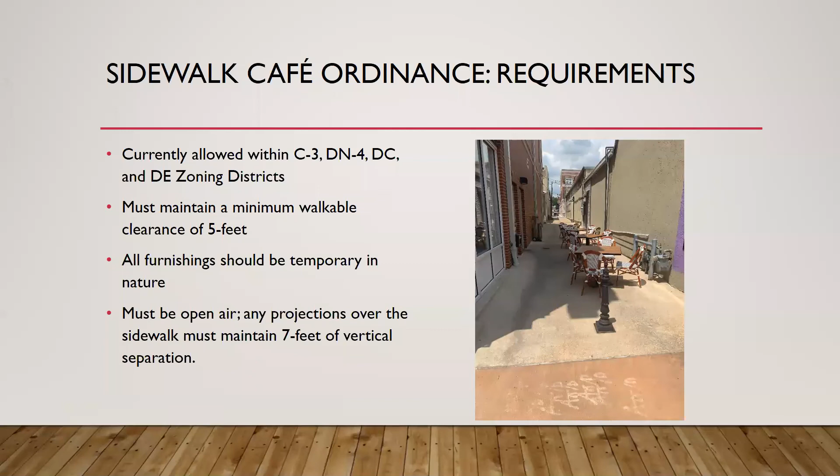The requirements for sidewalk cafes are very general. You just have to allow a minimum walkable clearance space of 5 feet between your outdoor furniture and the building, or the outdoor furniture and street trees. As long as there's 5 feet of walkable space, you're good. All furnishings must be temporary in nature, so they need to be such that you can take them out and put them away after close of business. Sidewalk cafes need to be open air, and any projections over the sidewalk must maintain 7 feet of vertical separation. So let's say you have an umbrella on the table for your sidewalk cafe — there has to be 7 feet from the bottom of the umbrella to the sidewalk itself.

The application process right now for sidewalk cafes is very simple. We just ask that you submit a written request to the planning department at planning@bentonvillear.com and include a diagram showing the location of the sidewalk cafe in relation to the building, sidewalk, and street. The one on the right-hand side of the screen is an application we received where they gave us an actual architectural site plan. You don't necessarily have to go to that level of detail, but we need to understand generally where it's going to be located, where the furniture is going to be, and how it sits in relation to the street and sidewalk. A letter of approval will be issued to the applicant from Ellen, our director. We can also help provide maps if you need assistance with our GIS site — we can provide an aerial photograph of your site, and you can lay it out or draw it from there.

With that being said, that's what we currently do in regard to outdoor dining downtown. So we'll transition now into a discussion about the ordinance that's going next Tuesday.

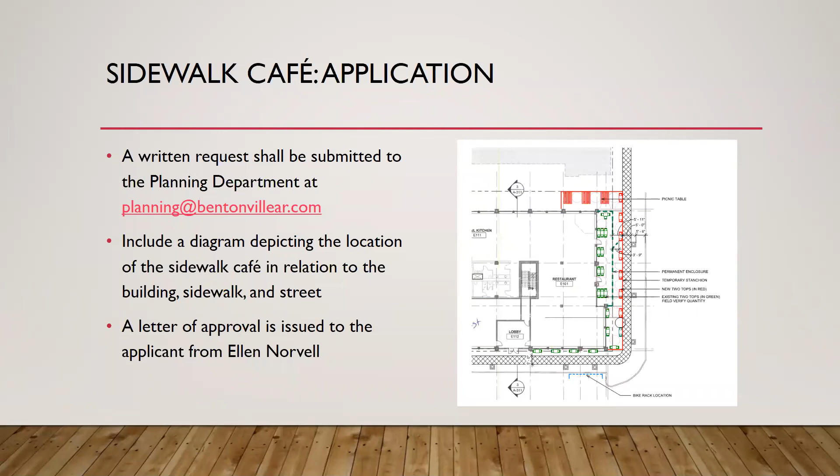We received a lot of questions and discussions. People understood, yes, I know I can do things out in front of my building and the sidewalk, but what about these public parking spaces a little bit closer to the street? Well, we've come up with a solution in the idea of parklets.

Parklets are defined by NACTO as public seating platforms that convert curbside parking spaces into vibrant community spaces. The idea behind a parklet is that it allows you to convert that public parking space into outdoor dining and seating space. It allows you to utilize public space for private uses, and it allows downtown business owners to utilize that critical space adjacent to their property.

Let's explain what NACTO is for people who may be on the line that don't understand what that is. NACTO is the National Association of City Transportation Officials. It's essentially a professional organization that has their Urban Street Design Guide. They have an Urban Parking Design Guideline. They provide these guidelines to city, state, and federal officials so that they can better design the urban form around some nationally accepted standards, for functionality and safety.

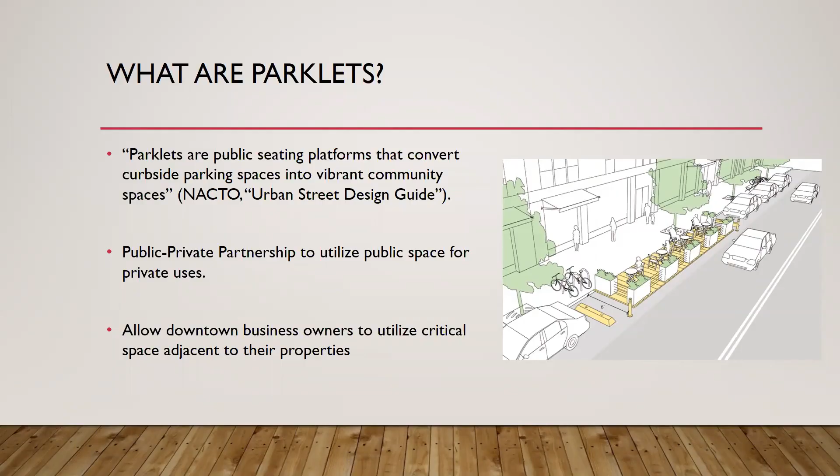So why do we need them, or why do we think it's a need? Well, COVID-19 has limited the ability of local restaurants to conduct their current business uses. And as I said earlier, we received a lot of feedback about the lack of adequate sidewalk space or designated parking areas for individual businesses downtown. They also provide us a unique opportunity to create a safe, pedestrian-oriented environment, allowing for a much more walkable urban space adjacent to businesses.

So getting into the actual ordinance itself, we're going to allow downtown businesses to enter into an encroachment agreement to utilize the public space adjacent to their business. Very similar to the Sidewalk Cafe process, a written request will be submitted to the planning department at planning@bentonvillear.com. We just ask that you include a diagram showing the area you're going to be occupying, and then we will sign that encroachment agreement, which lines out provisions such as indemnification and maintenance of the parklet.

There's an insurance requirement associated with it, and then minimum design standards, which I'll hop into in a minute. We don't ask you to necessarily lay out your entire site in regard to those design standards, but you will have to agree that you're going to meet them. I'll go ahead and transition into those design standards.

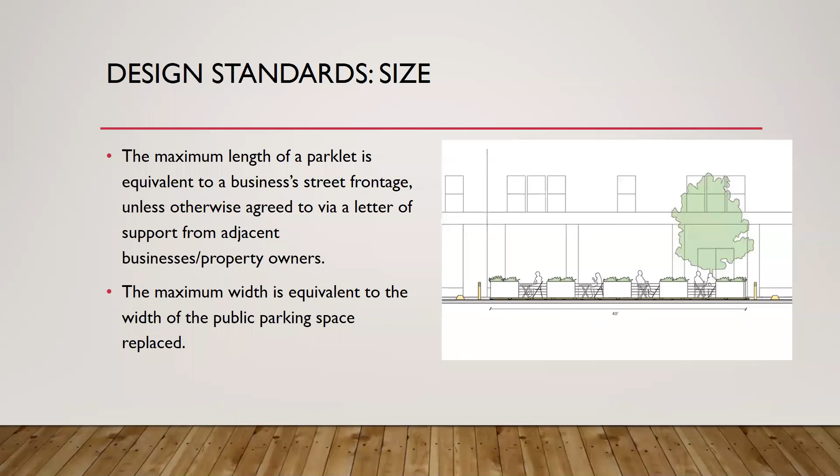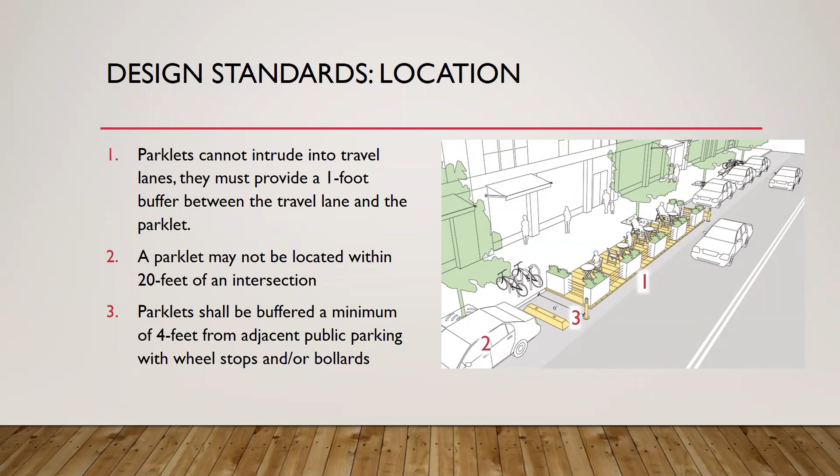And then parklets should be buffered a minimum of 4 feet from adjacent public parking with wheel stops or bollards. That just provides for separation from the parklet to adjacent public parking spaces, which allows people to actually be able to parallel park adjacent to the parklet without causing safety issues for either the car or the pedestrians utilizing the parklet.

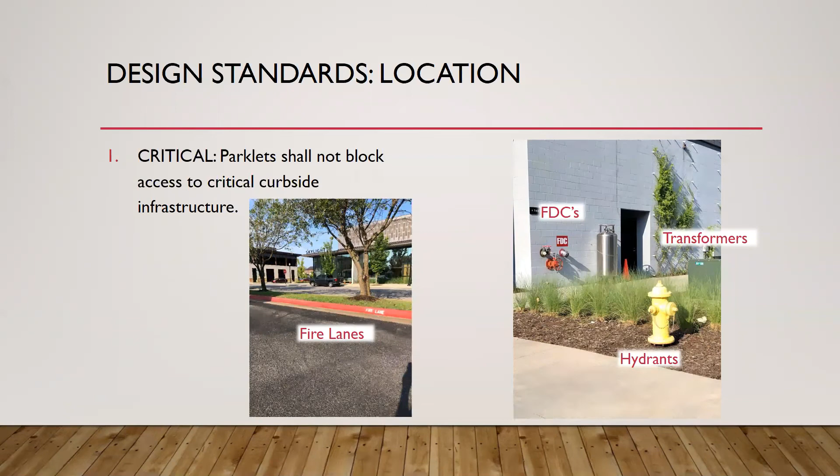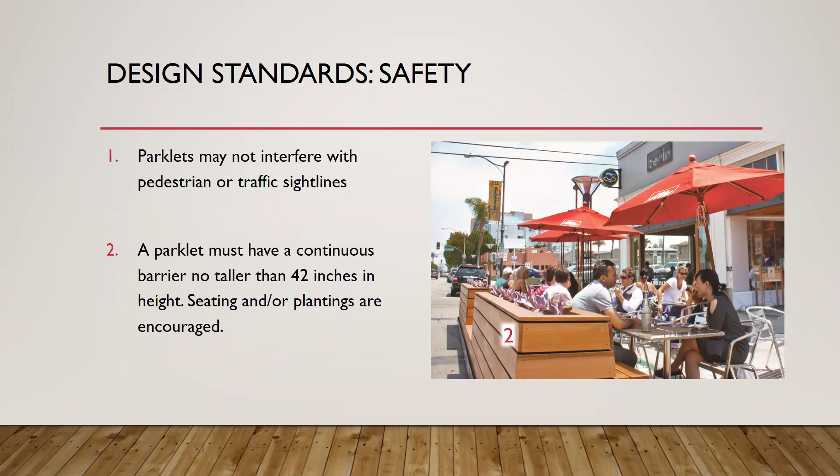Guardrails can be made out of steel, for instance. There's plenty of designs out there and plenty of inspiration. We're not going to dictate the specific look and feel of it, but we just want to make sure you have some kind of visible separation between the private use of the parklet and the public way.

Another critical safety standpoint is that parklets need to meet the requirements of the Americans with Disabilities Act. Some key provisions are the need for a 60-inch radius for wheelchairs, and then also being able to provide a 36-inch wide entrance at the sidewalk to the parklet itself.

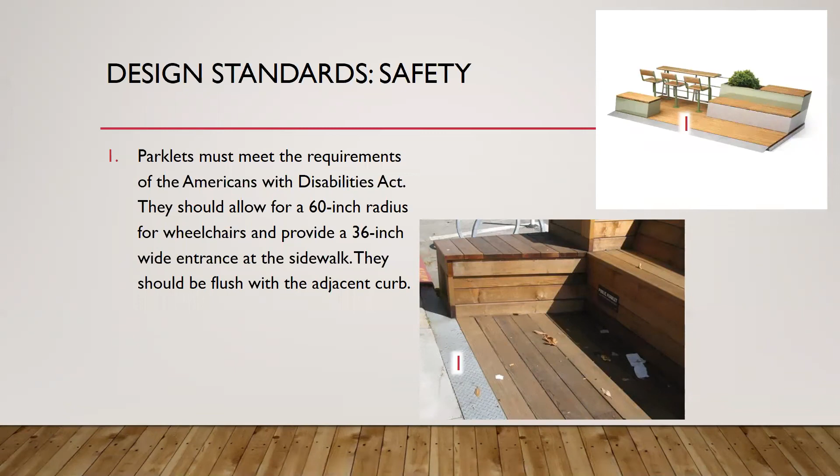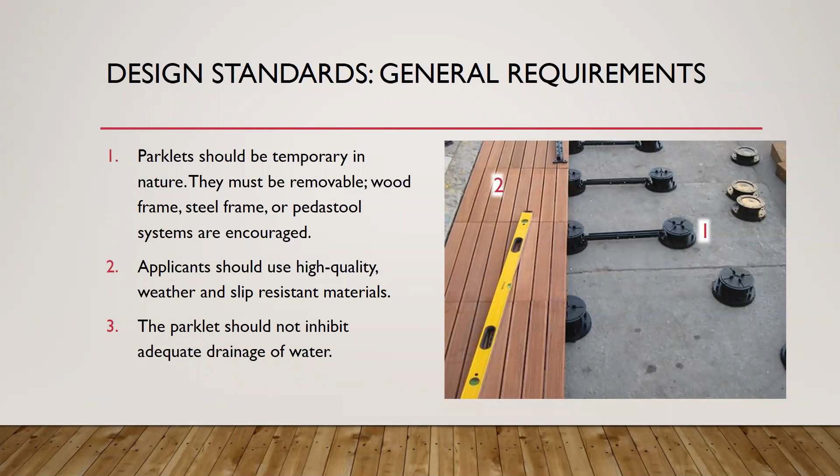Applicants should use high quality weather and slip resistant materials, both for safety and accessibility purposes. Again, the parklet should not inhibit adequate drainage of water. By doing an elevated system like that, or even systems where they'll do the elevated system and have mesh screens to keep debris from getting trapped underneath the parklet, you can help solve for those issues.

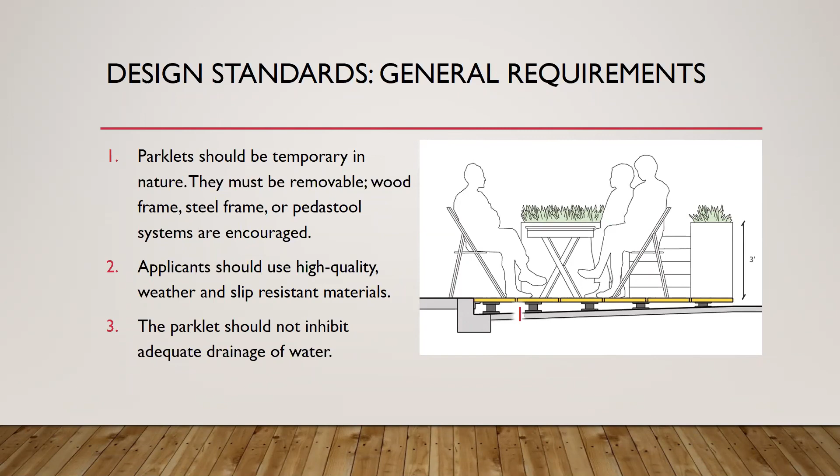Here's another look at that Bison pedestal system in service, where you can see it allows for a flush system with the parking stall on the right-hand side, where you have the fall all the way back to the curb, which may be slanted to allow water to drain to the curb line. This allows you to have a flat surface for dining, even though the roadway is slanted.

That brings us to the end of the discussion about parklets and the new outdoor dining ordinance in particular. Any questions about this, please direct those to planning@bentonvillear.com. This was just a very general overview of the current process and the future ordinance that we're looking at adopting next Tuesday. I would just ask that for site-specific questions, Danielle and I would be happy to schedule time to go through the specifics of your site.